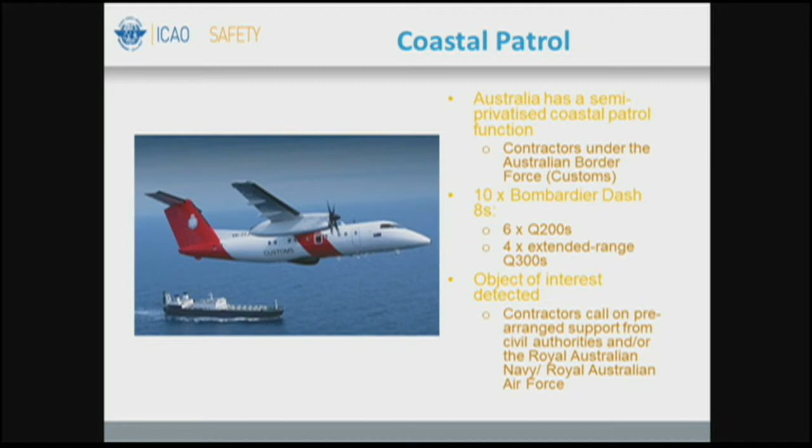And if the surveillance contractors pick up a target of interest, that target of interest is investigated by appropriate authorities, being the Air Force, Navy, or close to the coastline police. So in 2006, there was a trial done with Australian Coast Watch with a General Atomics Mariner, and thank you to General Atomics and Brandon Suarez for the permission to use the photos in this presentation. There's no certainty that the unmanned will take over from the manned in any sense in the future, but this scenario assumes that it would and looks at some of the issues if it did.

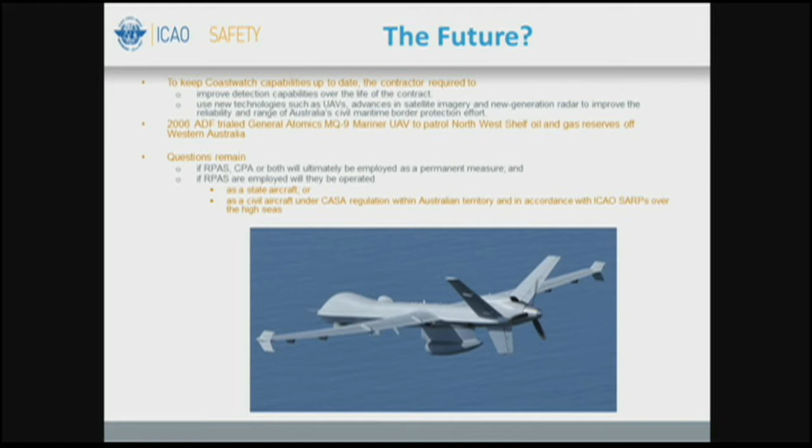The RPAS, the unmanned aircraft, if it did, may in fact be employed entirely as a military aircraft, or it may be a civilian aircraft. If it were a civilian aircraft, it would be the responsibility of my employer, the state regulator of Australia, and it would be operating under ICAO standards when it was over the high seas.

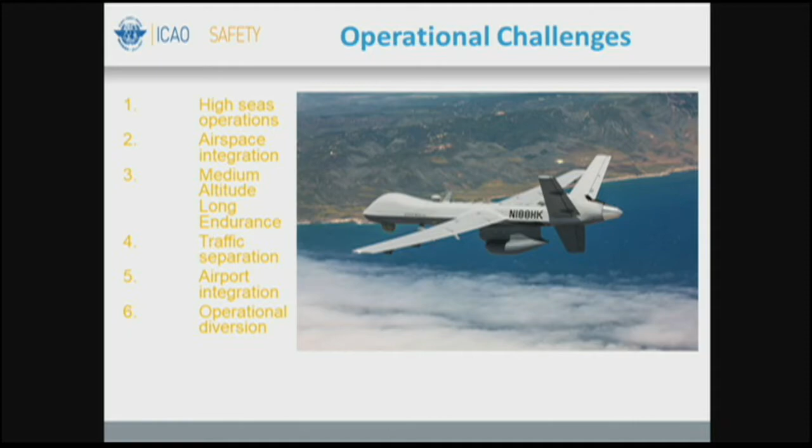So in order to bring this presentation down into a meaningful time frame, I've chosen to look at 6 different operational challenges. There are obviously many more challenges that would face an operator doing this sort of operation, but for the illustration of the fact that we've looked at appropriate standards and that the standards that we're settling on would deal with the situation, we'll use these operational challenges to illustrate. So we've got the fact that it's a high seas operation, the airspace integration piece, the fact that it's a long endurance vehicle capable of 40-hour operations, the traffic separation, airport integration and operational diversion issues. But there are many other issues for an operator to grapple with.

So, as a high seas operation, as I've outlined, it must follow all international norms. The ICAO standards all apply. So the two important articles of the convention that Filippo touched on are Article 8, which states that the contracting state of that aircraft undertakes to ensure that the aircraft flown without a pilot in regions that are open to civil aircraft must be controlled so as to obviate danger. And that's a clear principle on which we've been building the standards that we're now proposing.

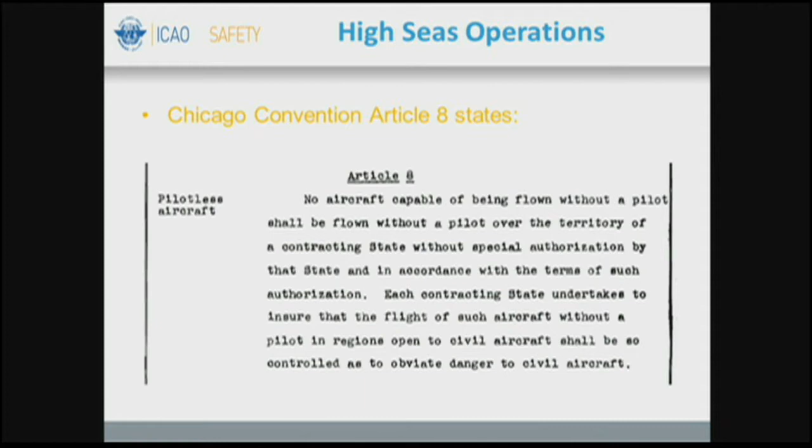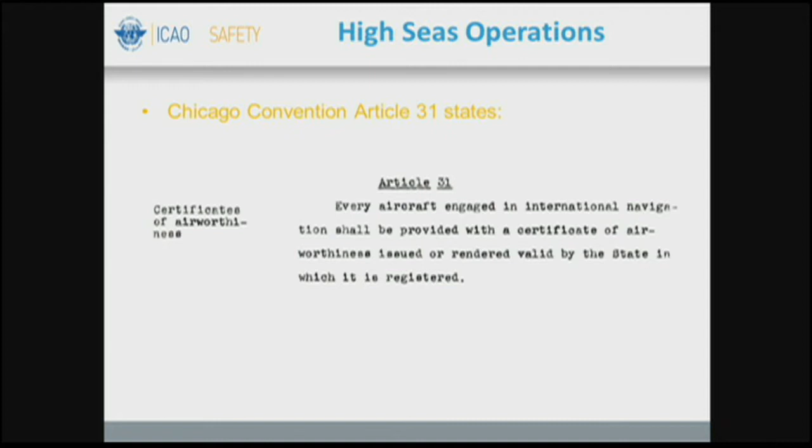The part of Australia that this aircraft was trialled and the part that I've focused on is the northwest coast. It's an area that has petroleum resources and gas resources, and it's also an area which is the way in which people who would want to come to my country by sea typically come. It's also an area which is close to other states, and the fisheries are sometimes poached upon. So it's an area that is interesting to Australia to keep an eye on.

Okay, so airspace integration. The assumptions we're building the standards upon - general assumption 2 is interesting in this regard because it talks about the RPAS needing to meet the CNS requirements in the airspace in which it flies. An illustration of how the proposal for Annex 6 Part 4 deals with that issue: we say the operator shall not engage in IFR RPAS operations unless they have a certificate attesting compliance with the standards of this section. So that's a very broad statement that the operator, the aircraft and all of its equipment must meet those standards.

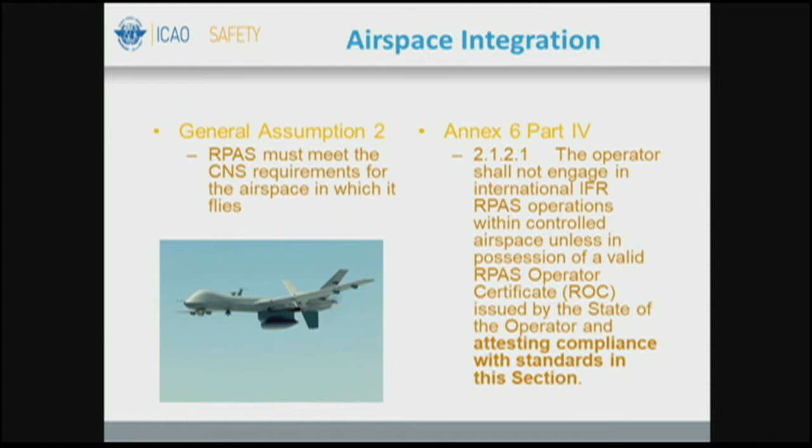So we've got potentially a 40-hour endurance aircraft with a service ceiling of flight level 500. That puts it in the range of airline traffic coming into and out of Australia. Normal operations are about flight level 250, so that entirely covers the range of IFR traffic that is there. So it would be mixing it - it's not something down at low level.

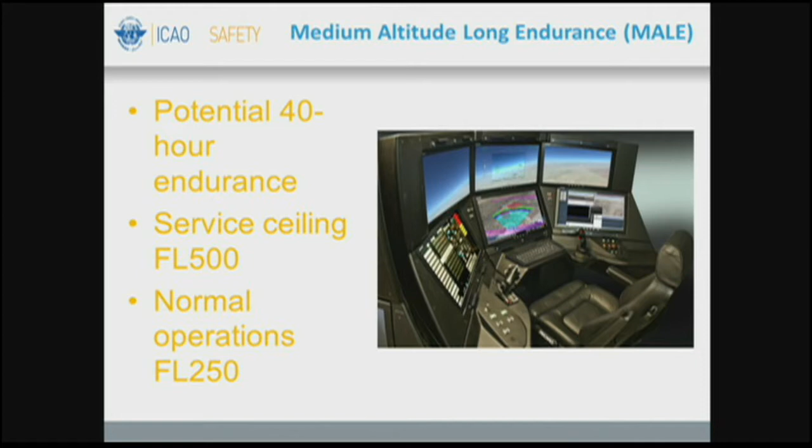With a 40-hour endurance, we're looking at multiple day missions, meaning several busy periods in any given airspace, because airspace has a daily cycle where things are extremely busy according to the time of day that air traffic is aiming to get to its destination, and then points of the day when it's not as busy. Crew fatigue management obviously is a big issue with an endurance like that, but in some ways it's easier to manage from an unmanned perspective because pilots are in their own time zone regardless of where the aircraft is. In any case, crew fatigue management standards match those for the manned community in the proposals for Annex 6.

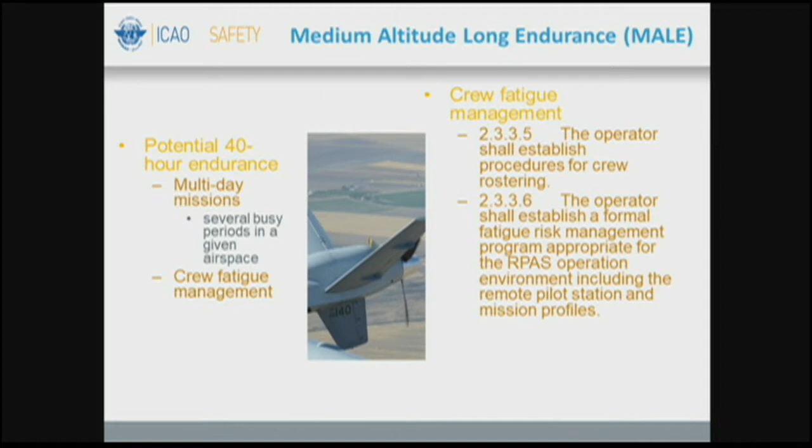So we've got an illustration of the traffic patterns across Australia and near Southeast Asia. Northwestern Australia is the entry and exit point for traffic going from the Gulf, from Southeast Asia and from Europe direct to Australia. It's also the point at which all traffic to New Zealand from those points comes across. So it's a reasonably dense part of the world. To give you context, Indonesian aviation as an industry became bigger than Australia about 3 years ago and will become bigger than the UK by about 2030. So our near neighbour is already a very big aviation country and becoming much bigger, meaning traffic densities in that part of the world are quite high.

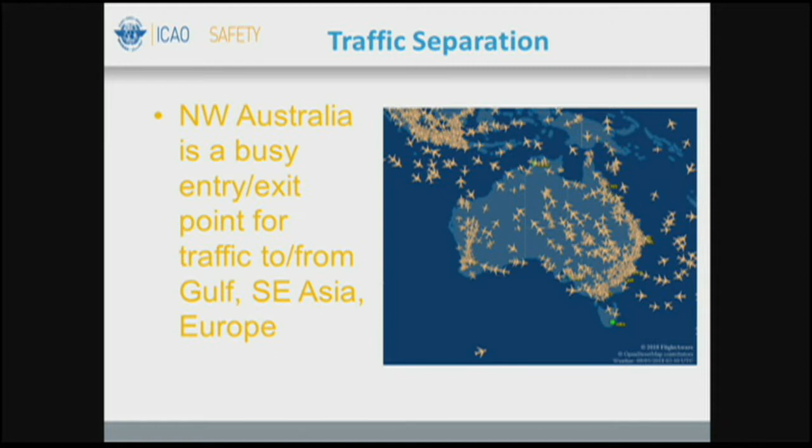Here's an illustration of the ADS-B and radar coverage for that area - obviously not far out to sea, but you have to get to flight level 290 before you get coverage across the whole country. At low level, the distances are just too vast to cover at 10,000 feet. If you threw that sort of picture across Europe or North America, I imagine you'd get coverage at a much lower level.

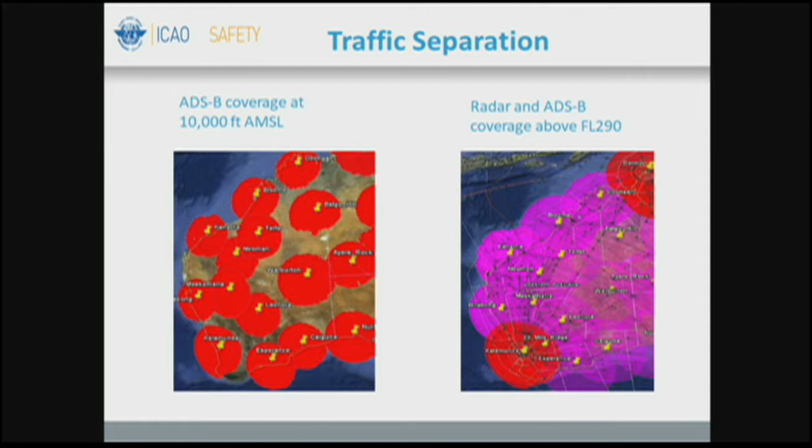Talking about lost link for traffic separation - operators have to ensure their C2 link interruption procedures are appropriate for the operating environment, and the collision avoidance function of the aircraft must meet all the standards in Annex 10, even in the event of lost link. So when operating in airspace that requires a transponder, the RPA is also required to switch to a beacon code to identify that the link has been lost.

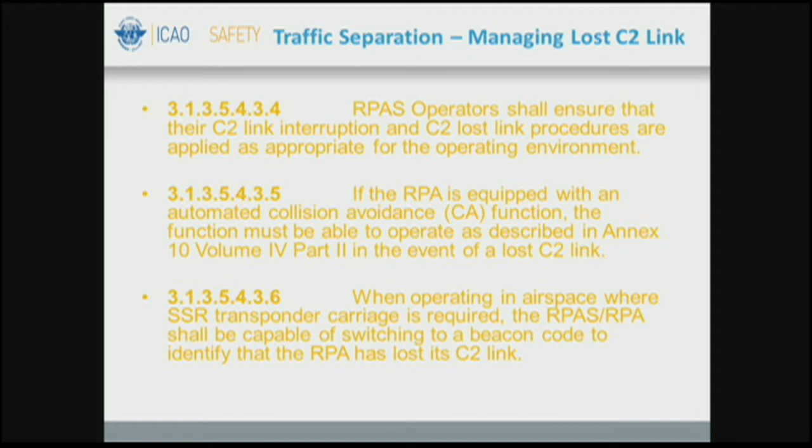Regarding communication with air traffic control, the capabilities are required to meet the RCP performance specified for that airspace. This is all very similar to what is the case for a manned aircraft. Obviously, in addition, if there's a requirement to relay through the aircraft, there are additional requirements to mitigate the failure of that.

Detect and avoid is an issue peculiar to RPA, and the requirement is for aircraft operating remotely to have the ability to avoid conflicting traffic and all other hazards, regardless of the circumstances.

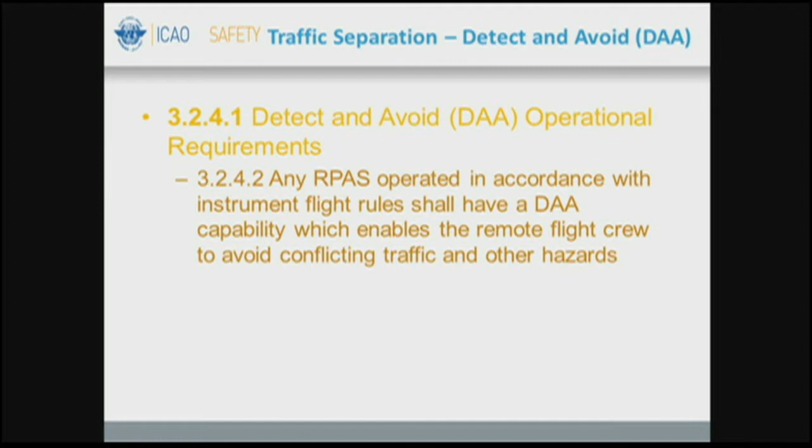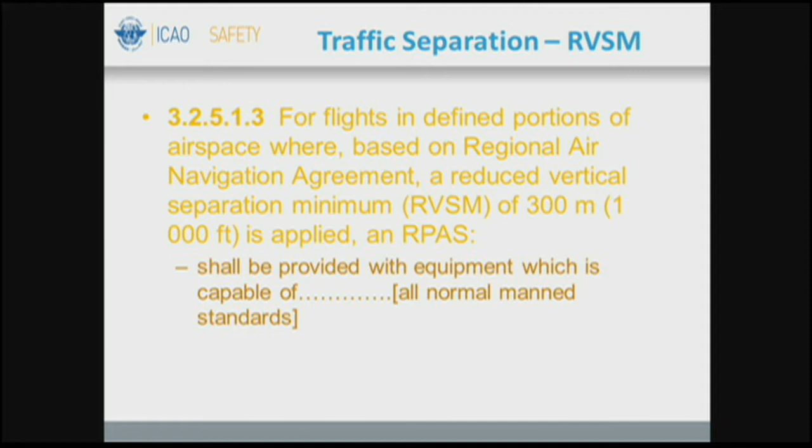RVSM again is an issue very similar to the manned requirement. For the areas where RVSM applies, the separations required are the same for RPAS, and they shall be provided with equipment that meets those standards, so the standards are completely reflective of what we're used to.

Airport integration issues are obviously an important consideration. This part of Australia doesn't have that many airports. It's not a highly populated area. The population there is mainly congregated around areas associated with the resources industries, and the paucity of airports means that interoperation with manned traffic would almost certainly be required and would have to be planned upon, even if it was from its own unique airport, because any diversion would be to an airport that had significant manned traffic, that because of the paucity of airports there and the occasional high density of people for the resources industry, the typical traffic is 737, A320.

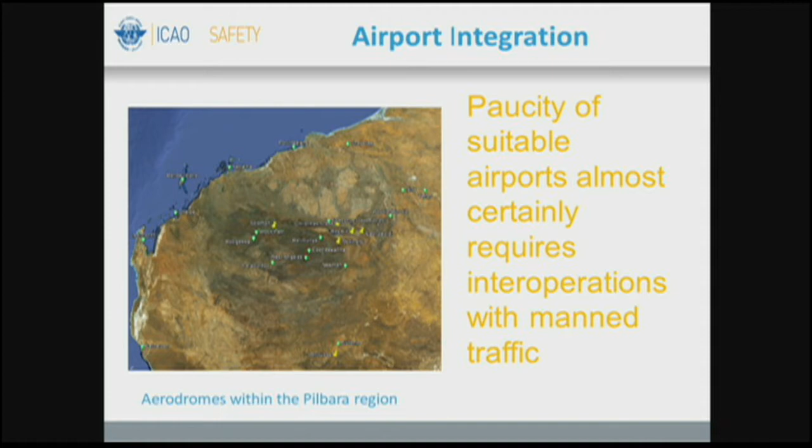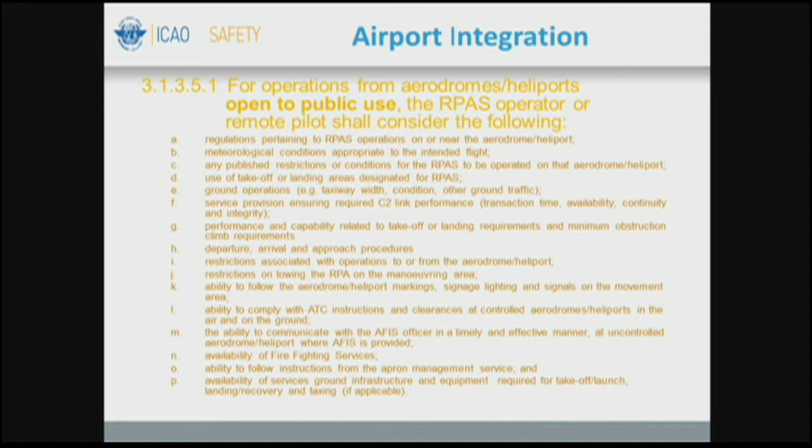So for airport integration, the requirement is that the operator shall designate a pilot that has adequate knowledge of all airports that are used or may be used for alternates. Very familiar requirements to those of manned aircraft.

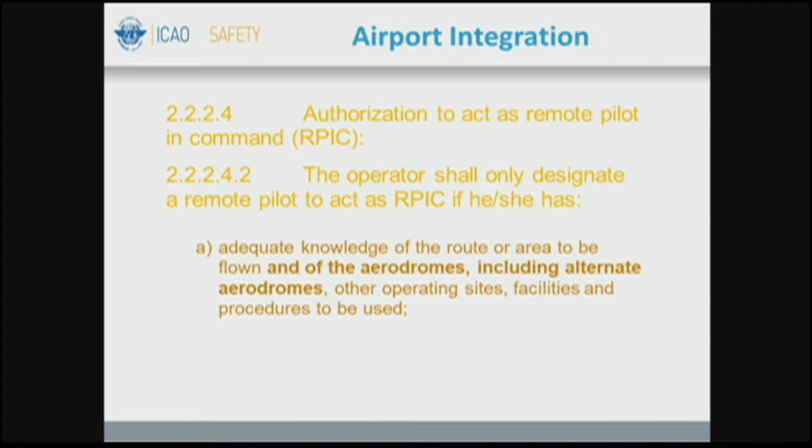Operational diversions might pose very interesting issues for the operators. Diversions could be applied for operational reasons because the aircraft perhaps finds something of interest late in its operational sortie and is required to divert somewhere else as a result. Alternatively, the diversion might be required as a result of an emergency. There may be a limited number of airports in this part of the world where such a large aircraft can operate to, and you have to question what are going to be the protocols for a diversion of an unmanned aircraft for an emergency purpose across an international FIR. That will be an interesting scenario.

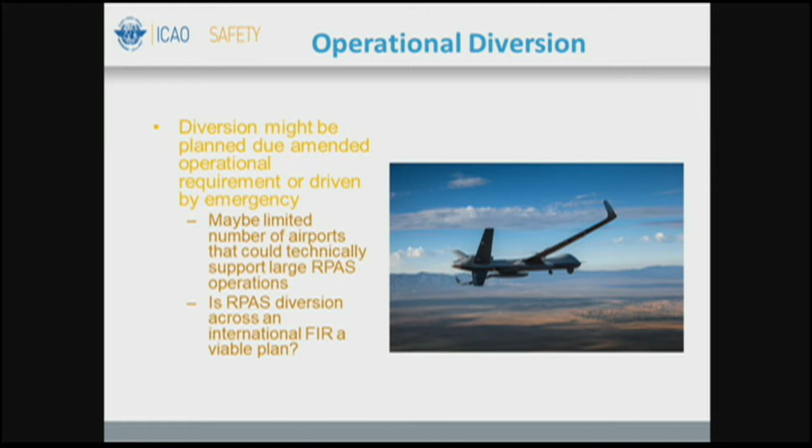So for flights on which it's intended to conduct an instrument approach and landing, that capability must be available at any of the designated alternate aerodromes. Very much a manned requirement, and something that is reflected here.

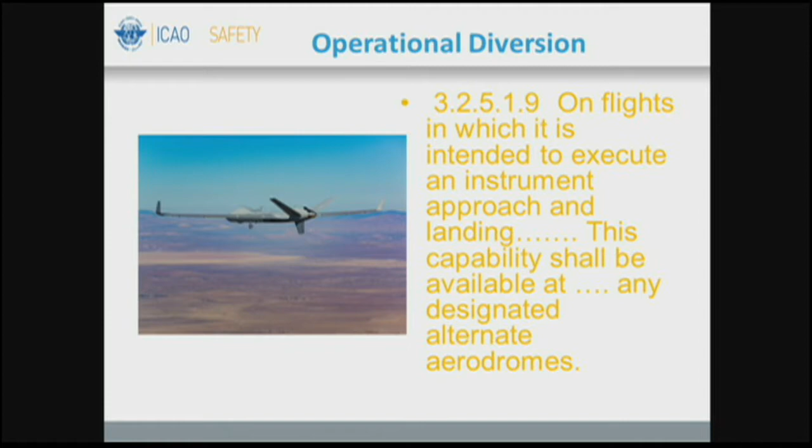And similarly for operational flight planning, there's a requirement for the operator to provide for the safe route of the aircraft, including for all alternative airports.

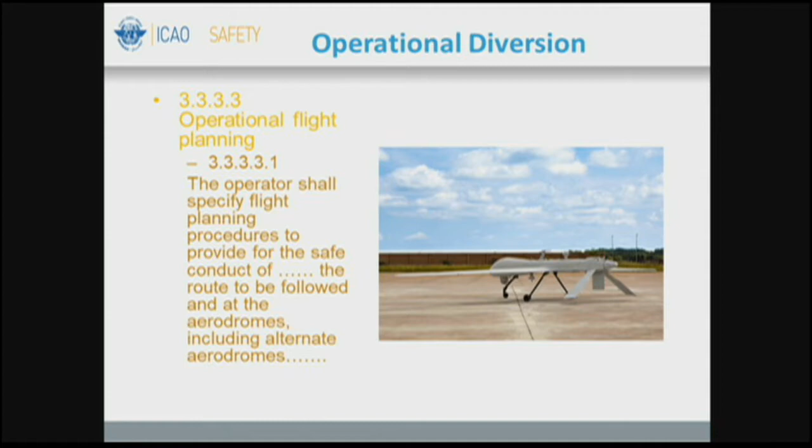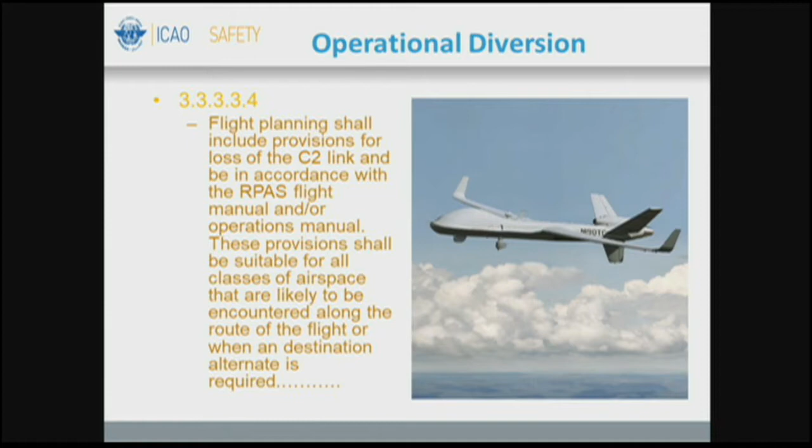And flight planning obviously has to take account of the possibility of loss of the C2 link, and there would be requirements to provide for that across all classes of airspace that are likely to be encountered along the route. Something that is unique to the unmanned realm.

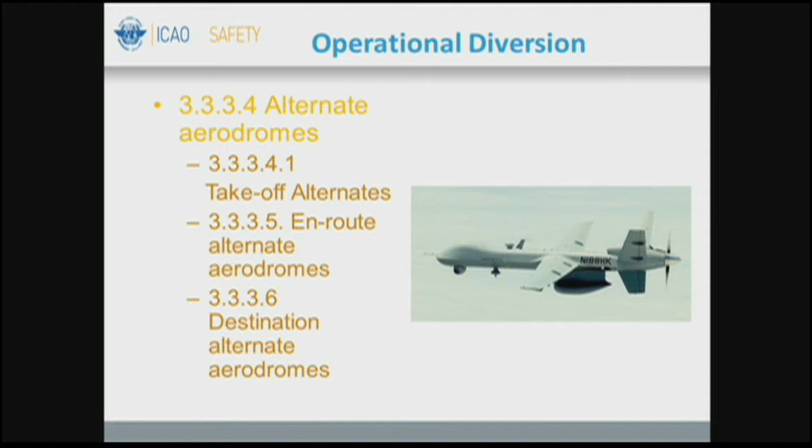Alternative aerodromes - we've also got requirements there for takeoff alternates, en route alternates and destination alternate aerodromes. Very much what you would expect for manned operation of a similar aircraft.

So in summary, the proposed scenario is different to matters which are traditionally dealt with by ICAO. It's an aerial work function, being surveillance, not an air transport function, which ICAO is typically interested in. It's an A-to-A operation via international waters only, and because it's traditionally an operation that's conducted by a state rather than by an aircraft operated by a civilian operator, it's not really considered by ICAO's freedoms of the air. However, in leveraging the legacy SARPs that we've had to work with, we've been able to provide a framework through Part 4 that proposes sufficient operational requirements while, we believe, making the operation viable.

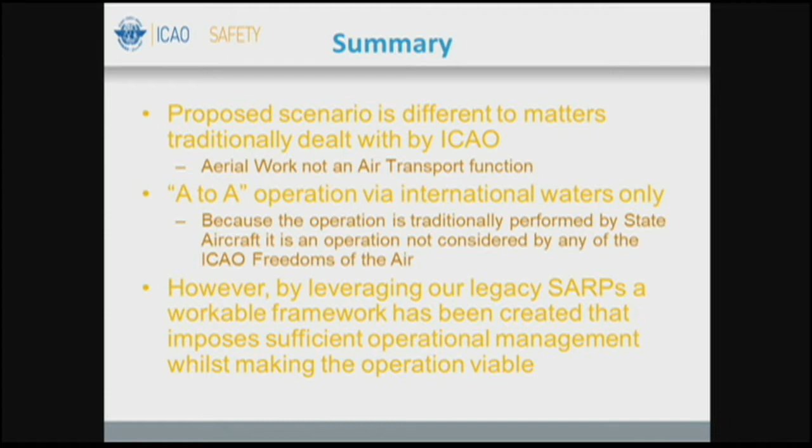Okay. Any questions for Andrew from the floor? And I see Dominique waving in the back there, yeah? And your second, Dominique. Good morning. Thank you, good afternoon, sorry.

Thank you for this very interesting presentation. I have a question about the RVSM operational capability. Do you consider that when an aircraft is flying in RVSM airspace with 1,000 feet separation, when the RPAS is losing the link, it's also at the same time losing its operational capability because of lack of alerting and monitoring? So do you consider that it should exit RVSM airspace right away or not?

Want to take that, or shall I? Oh, you can take it. Yes, it's an interesting scenario. The aircraft is required to meet the standards, as I've stated. It will do what is required of it by its state of operator. And these are some of the things we're going to have to work through - that's about as close to the answer as I can get.

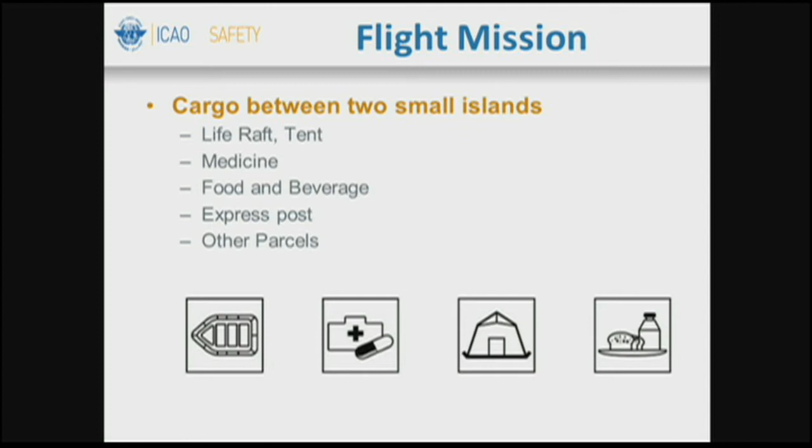The operation scenario: think about it, in the South China Sea we have two small islands in a remote area. They need to be connected with the mainland, and they also need, in some emergency situations, support from the mainland. So that is why the operator is thinking to provide postal service, providing medicine, life rafts, food, beverage, and also some express post.

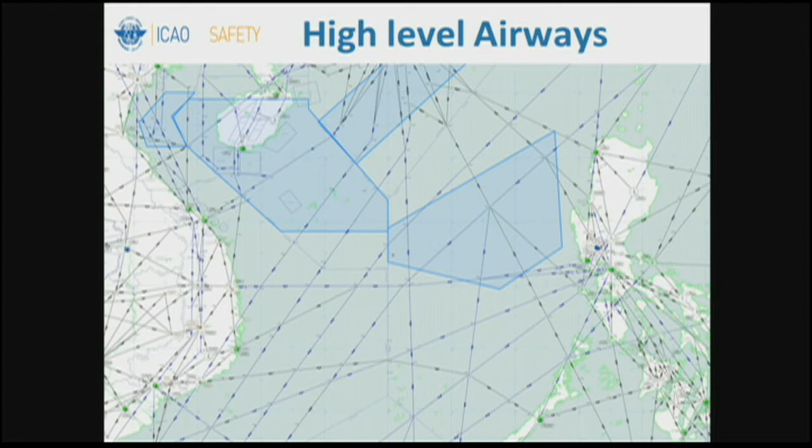But this area, even though people are living on a remote small island, is quite a busy area because we have a lot of international airways. Look at this picture, you may find in this area the international flight traffic is quite busy, so the air traffic flow situation is significant.

Well, the scenario is quite simple. They will take off from island A, which is within the FIR of Sanya. They land in island B, which is within the FIR of Sanya, but the en route flight will cross two other FIRs, that is Ho Chi Minh FIR and Manila FIR. They also have alternative airports for landing, because for takeoff they don't need an alternative aerodrome since the only option for them is to fly back to the original airport.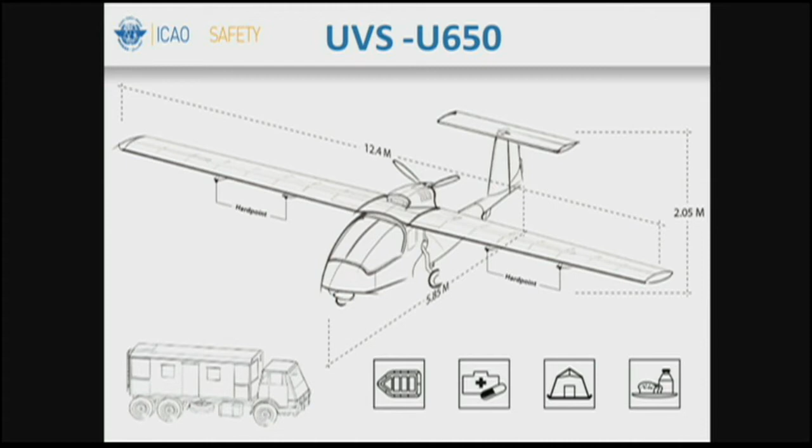This is a general picture of the general characteristics of the small unmanned aircraft system. I think the following information will be quite important. The aircraft's maximum takeoff weight is 750 kilograms. The payload is 250. The ceiling, or the altitude for the flight of the aircraft, is 7,000 meters, but the cruise, or for this flight, the altitude of flight is 3,000 meters.

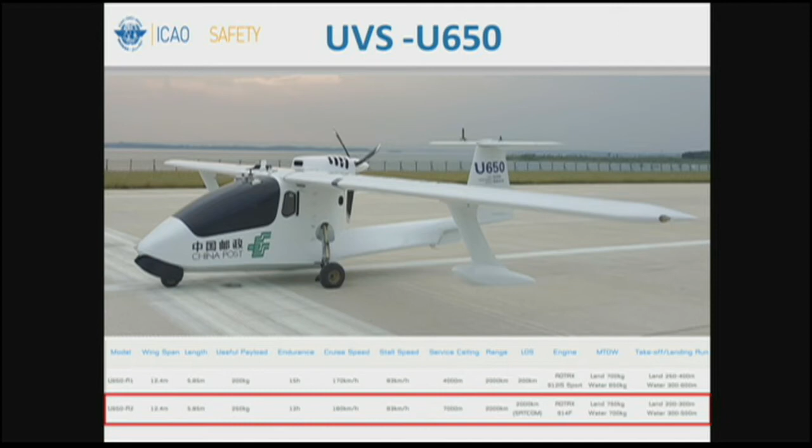So the general requirement for safe flight, which is quite simple for the RPA, is that they need to be type certificated, have a certificate of airworthiness, and be registered in the state of the operator. In this case it is simple: the state of the operator, state of registry, and the one country that will be flown over is one country, that is China.

For the RPS, in this case we have two RPS, one at the takeoff airport and one at the landing airport. But the RPS could be certified independently, or certified together with the RPA.

For command, C2, and communication for ATC: for the C2, it needs to meet the required performance link performance, or, now we have the new terminology, that is quality of service.

In this case, since China Post is not a C2 service provider, they choose a contracted C2 service provider. And this C2 service provider is under direct inspection of the CAAC, which is the Civil Aviation Administration of China.

For the communication of air traffic management, the ATC communication will meet the requirement across all the airspace of this flight from beginning to the end. We also have, in Part 4 of Annex 6, a requirement for the journey log document, which you may find in Section 1 of our document.

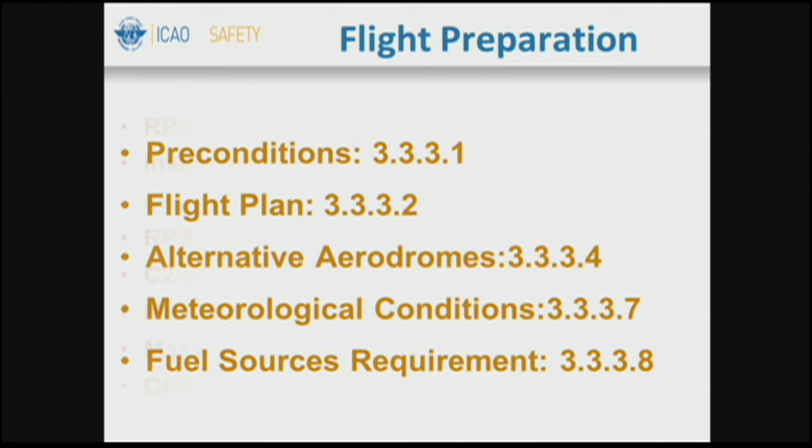For the flight preparation, we have several parts, but I will only point out a few of them. For the preparation, all these requirements need to be met before the flight could start.

The RPA should be airworthy and safe for the flight. Secondly, the instruments and equipment should be well installed and serviceable. The RPS should be suitable, serviceable, and paired with the remote piloted aircraft. The C2-link should not only be available and meet the required performance, but also be checked by the operator. The maintenance must be signed off, the mass and gravity well balanced, and the ops limitations well delivered by the operator and flight crew.

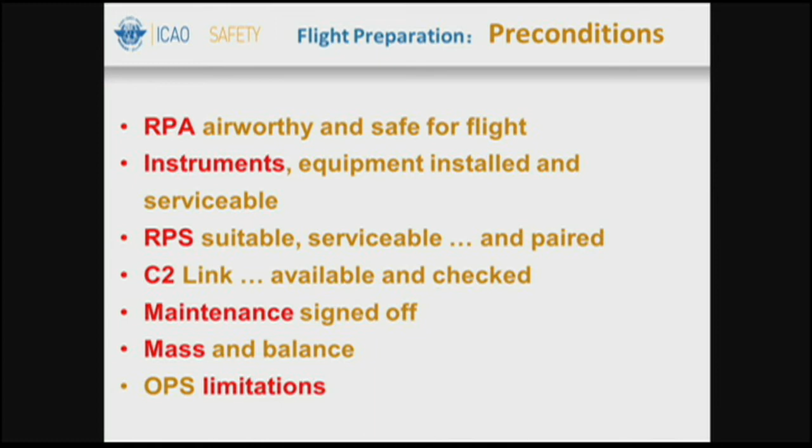Flight plan: the flight plan will be filed to the ACC of the original airport, that is the airport within the Sanya FIR. But the flight plan will be transmitted to the other ACCs of the FIRs involved, which means the flight plan will also be received by the ACCs in the Ho Chi Minh FIR and Manila FIR.

For diversion, because of a loss of the C2-link or an emergency situation, all diversions should be coordinated in advance during the flight planning period.

For the instruments, data, and equipment, since this case is happening at sea, this part shall be paid special attention. Not only the general requirements for international flight apply, but the RPA shall also be equipped with sound signals to avoid collision with other ships in that region, and also an anchor for maneuvering if necessary.

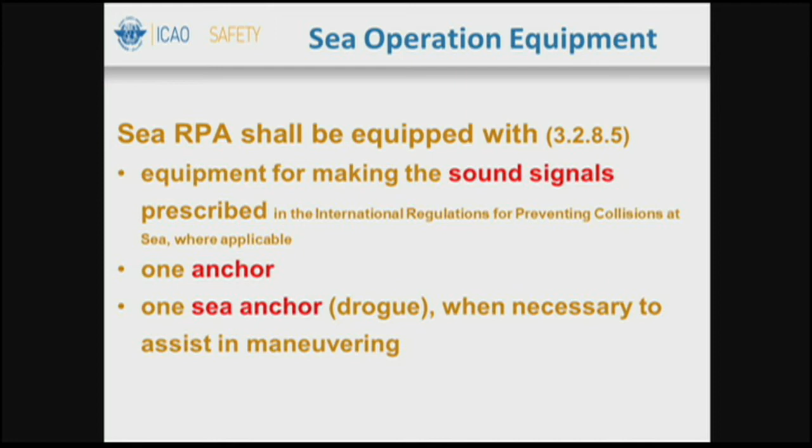For the takeoff from the Sanya FIR, the operator is responsible for establishing the pre-flight checklist, and the flight crew will follow the procedures well, as we have a long list from Andrew for the airport taxi maneuvering, trying to avoid any collision with other manned or unmanned aircraft.

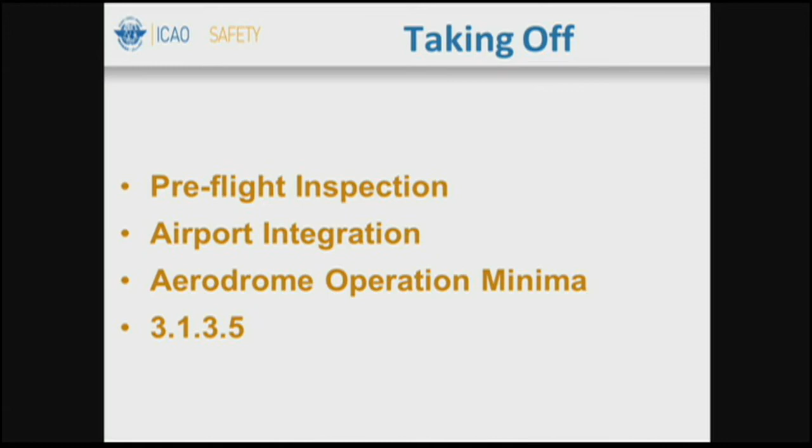It is not compulsory for the airport to set the aerodrome operation minima, but if the airport has such operation minima, the operator should follow the rules set by the aerodrome operator.

During the departure phase, the operator needs to follow the procedures of the Island A airport, paying attention to all the special considerations and limitations written in those procedures. En route flight in the Sanya FIR, separation service will be provided by the ACC of Sanya FIR.

The ACC will also provide the aeronautical information service. Here, since it is flying in quite a busy area, the flight altitude is 3,000 meters. Even if they have a separation service from ATC, the operator needs to guarantee the DAA capability so as to avoid any collision not only with aircraft flying in the air, but also with the terrain or other obstacles.

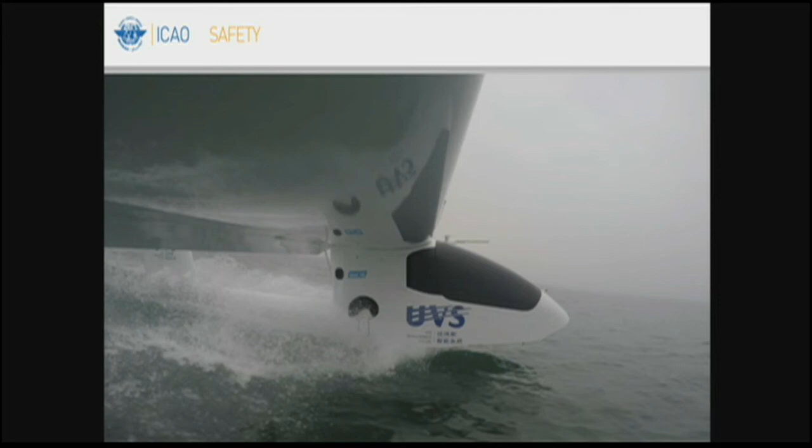Arrival and landing. In this part, the ATC service will be provided by the control tower. In this case, the airport is still controlled by the military, but open to the public. So we have to think about the coordination with the military. You also have to follow the limitations and special requirements of the military controllers. This aircraft is an amphibian remotely piloted aircraft. If we have some special situation or the meteorological situation is not feasible for landing on the ground, this aircraft could also choose to land on the water.

If we have a diversion in the Manila FIR, the diversion should be coordinated in advance with the Manila FIR, as we mentioned. Even in such a diversion flight, the special authorization is not required. So from the beginning to the end, in a normal flight or even in a diversion, in this case the special authorization is not required. In the scenario we mentioned, we have two islands as alternatives. We have two alternative aerodromes, but both are controlled by just one country, that is the country of the state operator. So it is not necessary to get a special authorization because the flights will not go into the territory of other countries. For an emergency situation, this remotely piloted aircraft could land on the water and the backup battery could support them for 20 hours.

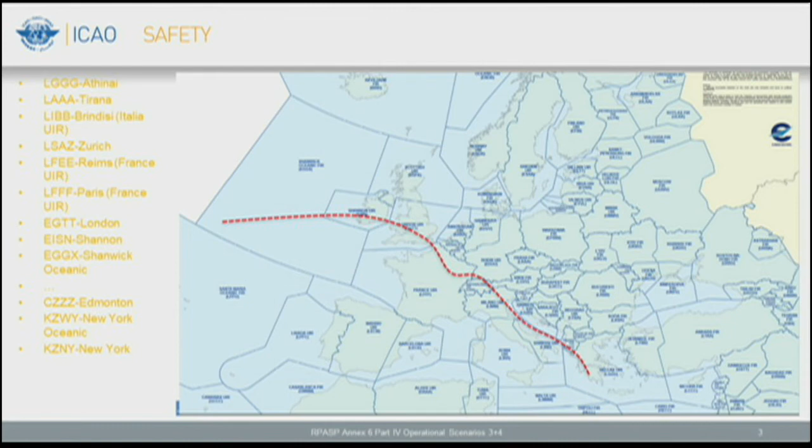So the scenario basically concentrates on an international cargo flight originating in Athens, crossing the European network, and then crossing the Atlantic Ocean, international waters, arriving in US national airspace for a landing in New York. That is the scenario. Here are the FIRs which will be crossed. First of all, we start in the Athens FIR. We continue via Albania, then to Italy, from Italy to Switzerland, from Switzerland to France, and then via UK and the North Atlantic track system over to the American continent and there in the NAS airspace.

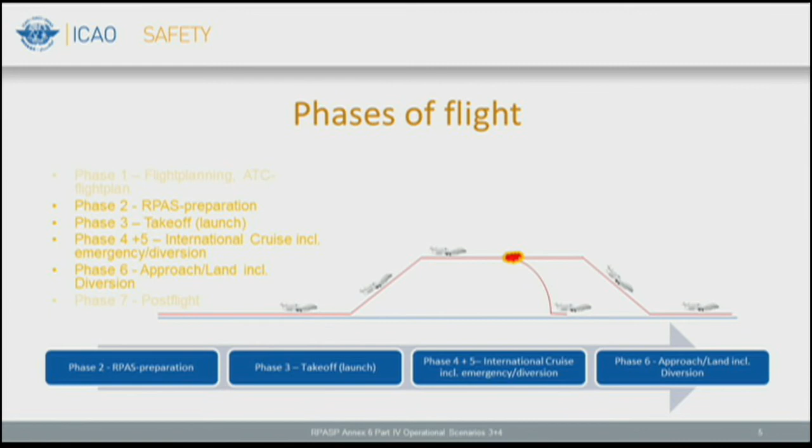So we divided the flight in 7 flight phases, from flight planning to RPAS preparation, and then via takeoff, the cruise, including a contingency scenario, to an approach and a landing and post-flight. However, the first and the last bit is not interesting for the example, so I leave it out. I start with the preparation because there is a difference to manned aviation. We basically start the flight with establishing the link between the RPS and the RPA. And that is something very important for the pilots because in manned aviation we are paid by block hours, and that is now the new time defined for our salary. Then you see the next phase is the takeoff, and the other phases follow consequently.

So we made some assumptions. We performed the flight with a certified cargo aeroplane, remotely piloted aeroplane, certified according to Annex 8. We have radio line of sight command and control link for the phases takeoff, departure, arrival, and landing for performance reasons. So you learned already the abbreviation Remote Pilot License, RPL. I introduce the abbreviation RLP, Required Link Performance, although we are in a discussion to change that expression. And the C2 link for the cruise phase is beyond radio line of sight. That is the satellite service already mentioned by my predecessors.

The complete flight is managed by one RPS, so far to the question why do you use 2 RPSs, located in Greece. And obviously all the problems, including the problems you raised as questions from the floor, are solved. So we have solutions to detect non-cooperative targets. We have all the solutions in place. That is basically the assumption for this operational scenario.

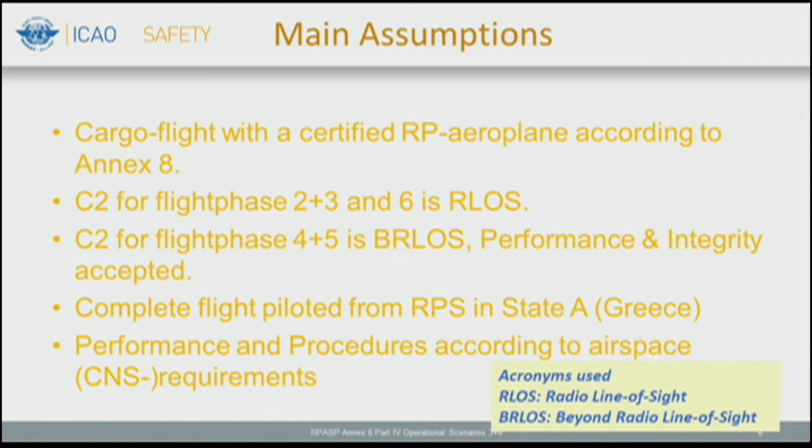As regards the diversion example you saw in the slides before, here this little cloud, there is some discussion ongoing how we deal with this, because obviously if we assume that we need a higher performance of the C2 link in terminal areas than in the cruise portion of the flight, then what do we do if we do not have provisions for this higher link performance in case we have to do a diversion landing in a third country, basically. So that is some issue we probably will need to address in the future.

So what do we have? We have country A responsible for departure. We have country A and B for the destination. We have country A and C for the overflight part and probably for the diversion part. And we have country A responsible if you cross the international waters. What does it basically mean? It is the same thing as in manned aviation. That's the reason why I said I have the most simple example, basically. We have one difference to manned aviation, and that is the beyond radio line of sight part.

As Filippo already explained, the provisions we foresee is that we have a service level agreement between the operator and the C2 link service provider, overseen by different issues. You already remember that slide. I concentrate only on this part because, as I said in the assumptions, the whole operation, the whole flight is in the hand of operator A and is overseen by the competent authority of operator A, of Greece in that example.

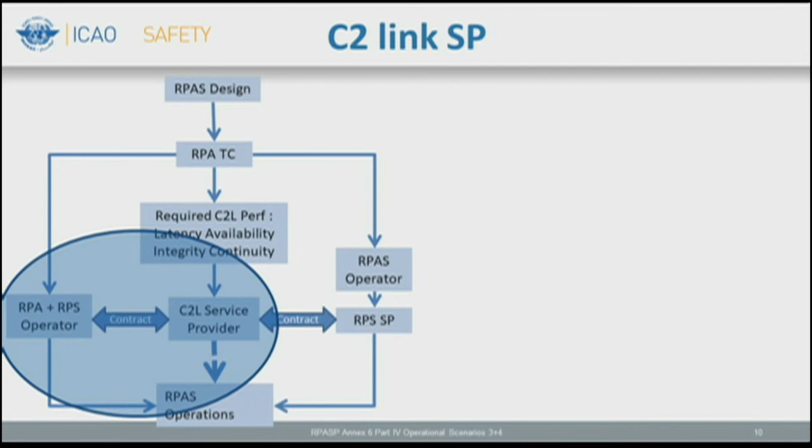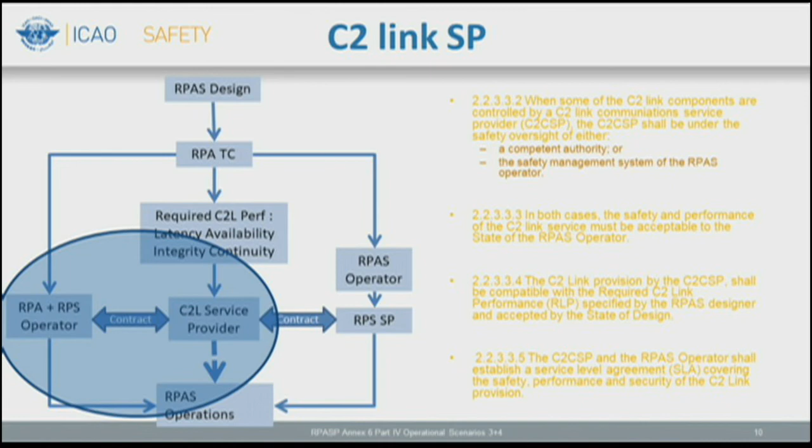And we have provisions in the text which basically deal with the relationship between this operator and the C2 link service provider. You might read the paragraphs in detail in our draft. What I want to highlight is we foresaw basically those two options Filippo already raised. Either the C2 link service provider has its own competent authority or he goes into the safety management system of the operator.

As I said, it's the most simple scenario. It's basically copying how we do international cargo operation in manned aviation right now, with the exception of the beyond radio line of sight C2 part, which is very crucial, I'd like to add, because the C2 link is not just communication. It is basically the physical link between the pilot and his aircraft. So it has much more criticality than just communication. And insofar, we are really looking into this issue because we know the principle of service level agreements, but I'm not aware that we have service level agreements right now which have such a criticality for the safe operation of a flight.

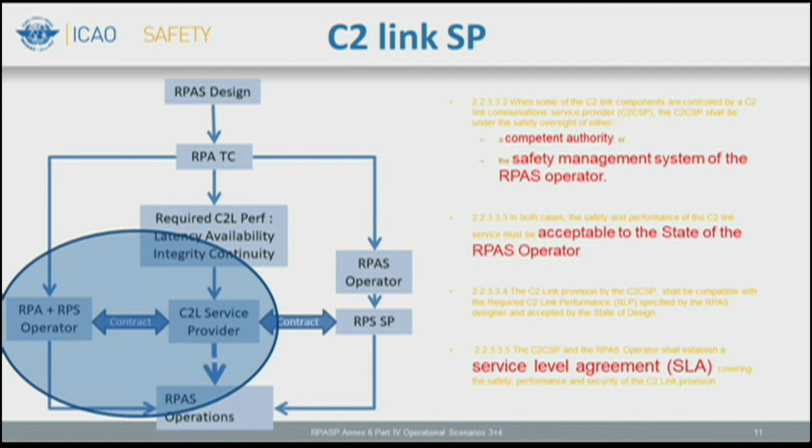So that was the most simple scenario. We can complicate it a little bit further. We have, in the sub-scenario 1, an RPS located also at the destination, probably because of the necessary performance. We could complicate it further, but that is not part of my presentation, basically. So I'd like to hand over to John, the regulator, who can give you the complicated scenarios and the complicated insight in the scenarios. Good job.

Good afternoon. I'm John Swigart, and as Thomas mentioned, I am a regulator. I am an aviation safety inspector. Most of my work with the FAA has been producing policy and guidance and helping to develop that policy and guidance for performance-based navigation operations and operational approvals and things like that.

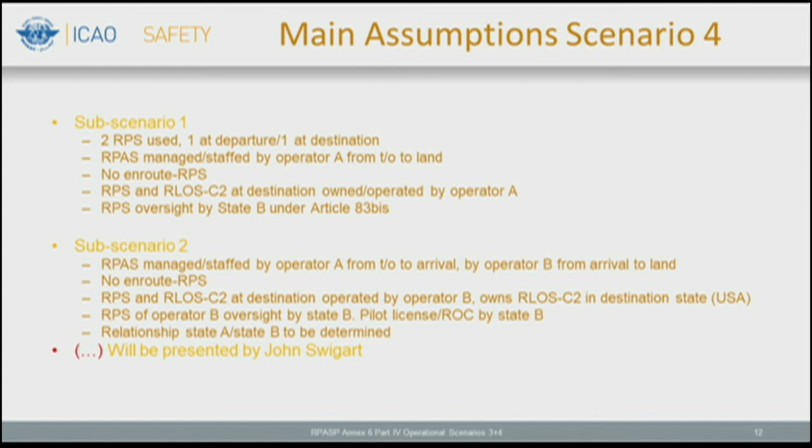So if you hear me say those terms, keep in mind that these flights, and all these examples today, when you have an ROC, they will fall under the purview of the local CAA, and the operation specifications for the areas of operations, special areas of operations, and all that will be worked out in greater detail later as we produce our RPAS manual. We incorporate RPAS into the PBN documents, Doc 9613, and all kinds of other things that need to be developed as a result of the basic groundwork being laid in Annex 6, Part 4. We got rulemaking, orders, guidance, operation specifications, and all that operational criteria and guidance will be developed as the technology becomes more mature.

this example, it is complicated, and I'll just explain a little bit more about that. It's not gonna take a great amount of time to explain it because I have a picture that's worth 1,000 words. So the flight is the same as Thomas presented, a flight from Athens, Greece to New York City. It's scenario 4, with various levels of interaction between the ROC operator and basically all third-party service level providers, the C2 link, the RPS station, and quite possibly the RPA itself, depending on what kind of an agreement the operator has with the ownership of the aircraft.

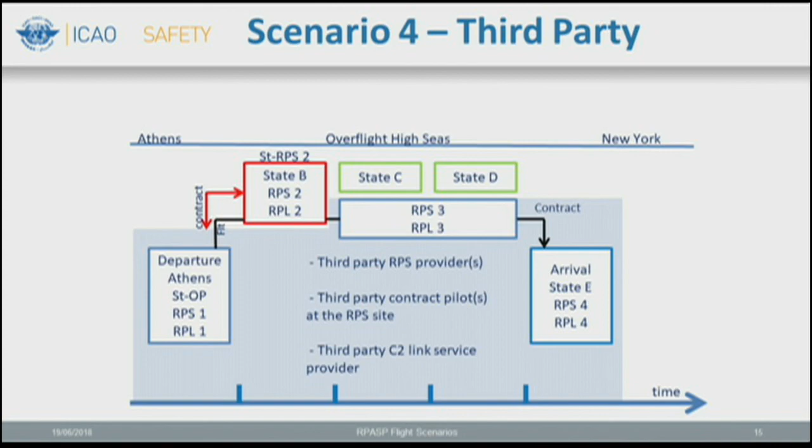Because there's no way for us to ensure, as regulators, that the operator is prepared for all these scenarios otherwise. So we provide the guidance, we provide all the rules, and we show operators the way. And in this case, each one of the pilots will have to be trained under those special operation specifications attached to the ROC.

And they will have to have direct knowledge of that. And the ROC will have to have some type of a direct agreement with the station itself and those contract pilots to ensure that they are properly trained, they're maintaining currency, type rating if it's required. Maybe it requires the use of a two-pilot crew for certain phases of the flight, and all things that are to be determined.

So, with that said, if you really think about it, you look at some of the complexities that challenge the regulators when we start to apply the SARPs and we convert those into our rules, and we make sure that when we approve an operator to fly over your airspace, they're as safe as the airspace, or as safe as the operator that you're sending back to, possibly, country A, country B, pick any countries out there in the world, and that's the way we do business today. So the same methodology will apply, but nonetheless, there is a way to get it done.

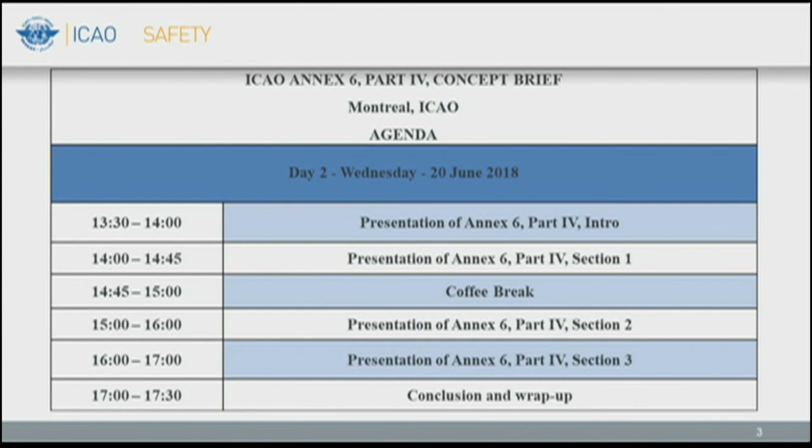Well, thanks for attending. I understand this is a fairly new experiment for ICAO. We will hear from them how they liked it, and I will tell them how I liked it. I hope it has been useful for you to see, through the high-level introduction and subsequently through hopefully realistic scenarios, what sort of issues we are facing within the RPAS panel, more specifically from our ops perspective, when we compare it to manned aviation. That's why we focused on introducing the items not known from manned aviation, because the things we know from manned aviation we will leave the same, but in other cases we will have to adapt, and we have found solutions for it, and we will present those solutions in a more concrete way tomorrow afternoon.

The scenarios were just setting the scene, giving you an idea of the problems you're facing, and one of the questions a bit earlier on was addressing quite a few of the questions we have been addressing the last couple of years. So I hope this helps you in understanding the difference between the manned and the unmanned world.